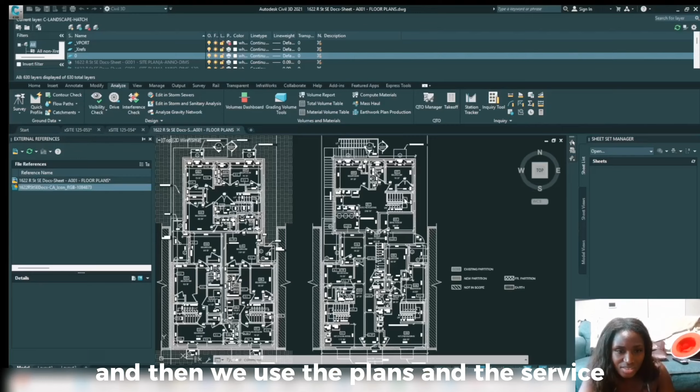After all the confusion of the design, we went ahead to call the client, which should have cleared things up, but led to more confusion. And then we used the plans and the survey's historical information of the site and information from the street view, and we got more confused. But enough of me talking.

Let's engineer something. So we're working on 1622 R Street, and it's a bit confusing. Are you guys removing the back of the lot and replacing it? Are we removing the back? Yeah, because the back of the building is more narrow than the survey. There shouldn't be areas on both sides to walk in. But there is on the survey, the plans that you guys shared.

Maybe because the plot I have, the survey that I have, has the complete overhang. Okay, can you please send an email so I can ask what's his name about?

Yeah, I'll ask. I sent an email earlier, about 2 hours ago. Because I'll follow up on it.

We're not. We were trying to do a lunch and learn, like a learning session with this project, and it keeps stopping for these small questions. Because I was doing the grading of the back of the lot, and also because we are removing the back of the lot.

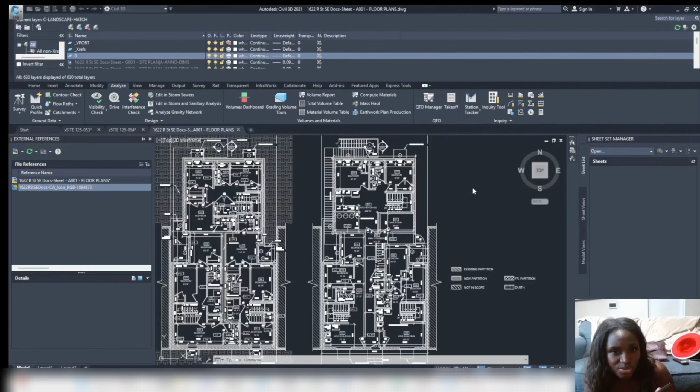So GAR will only be required if you exceed 100% of the tax assessed value. You're not exceeding 1.3 million, are you? Okay, so I thought so - GAR is not going to be required for this project.

Because I was thinking, if you are removing the back of the back of it, I feel like that's going to make this project a little more costly. No, we're not doing that.

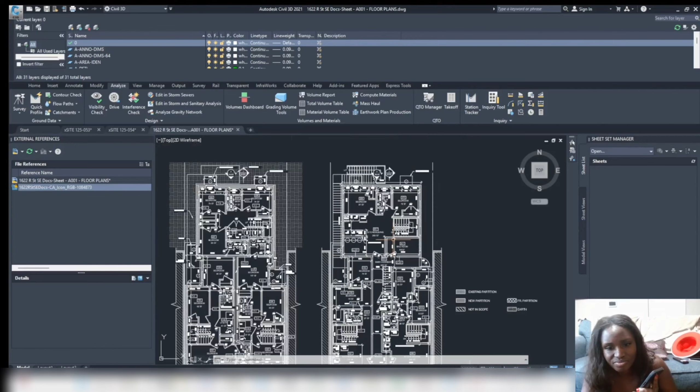Okay, I will send the survey again as well, just so they know. They're even showing the back of the lot as the building as new, and then the front is existing. So on the 4th floor, we're adding onto it because it's not extended all the way on the 4th floor, so maybe that's what they're showing as new.

I'm only looking at the cellar plan, and I'm looking at the cellar plan and the first floor. Okay, yeah, that's a good catch. I'll follow up with them as soon as I can.

You sent the email already? Yeah, I sent the email, but I'm gonna follow up and send more clarification to figure out what's happening. Because that was 2 hours ago, but now that we're getting deeper into the project, I'm seeing a few more things. So I'm just gonna send an overall email of all the issues. Okay, thank you, perfect, bye.

But I'll give us another 30 minutes. We're going to stop doing the site design and go into the utility sizing, and then I'll let you know. Okay, all right, thanks, bye.

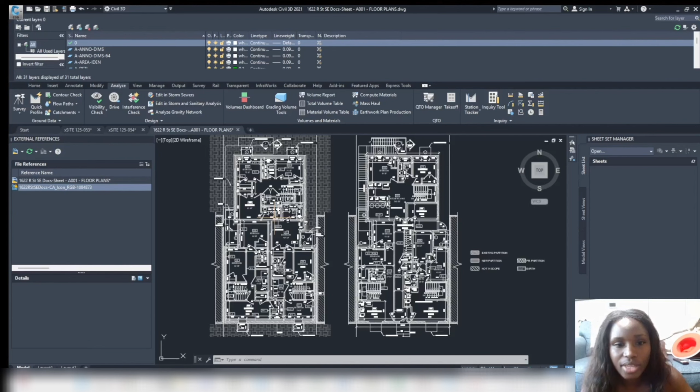That will just be summarized in the email. So for now, we're going to stop on the site design because that's a bit confusing, but we're going to keep that back parking area - that shouldn't be changing.

It's a different platform, yeah. So can you zoom out a little bit? I just have a question. Oh, I already closed out the other plan. The expect - oh, this one. Okay, good, yeah.

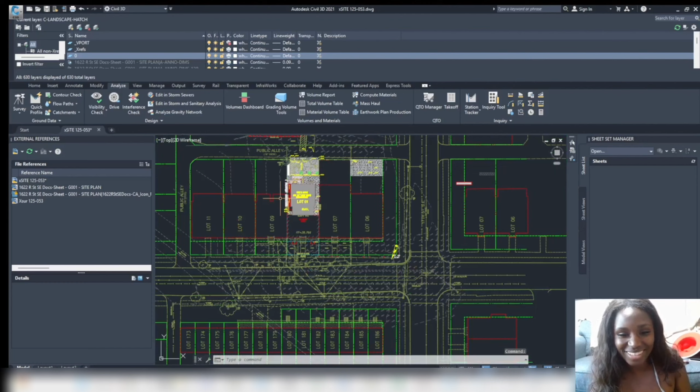So at the end of the parking lot, you see the elevation there. Can you zoom in? Yeah, it's like around 35.82. I think we need to remove one of these - this one? 2 stairs. No, if you go down. Oh, A2, yeah, for sure.

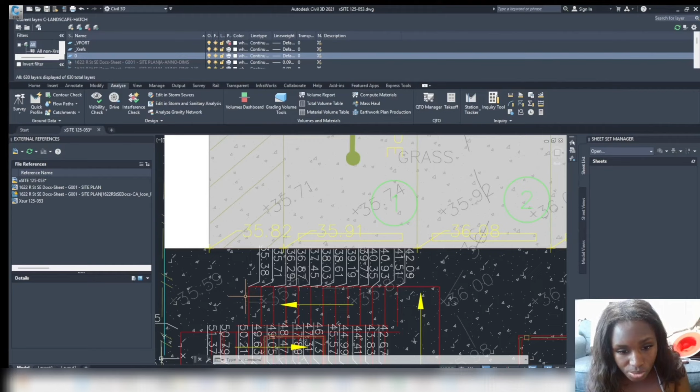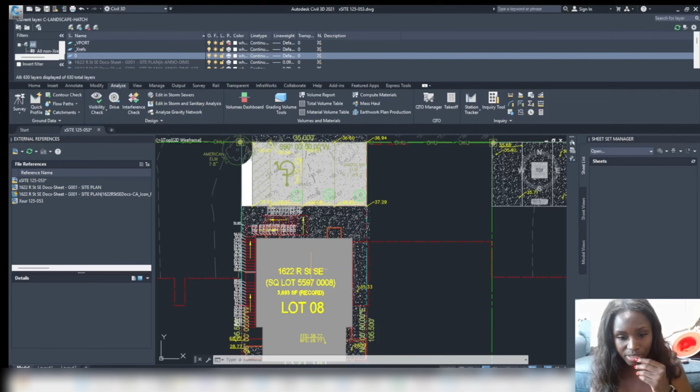We're gonna have to remove at least this stair and this stair, and this one we can just adjust it and make it a little bit more shallow. Okay, yeah. But we're gonna have to, or also we still have to go up another 2% or so to meet this elevation. But he said we're not narrowing it, so we're gonna leave it.

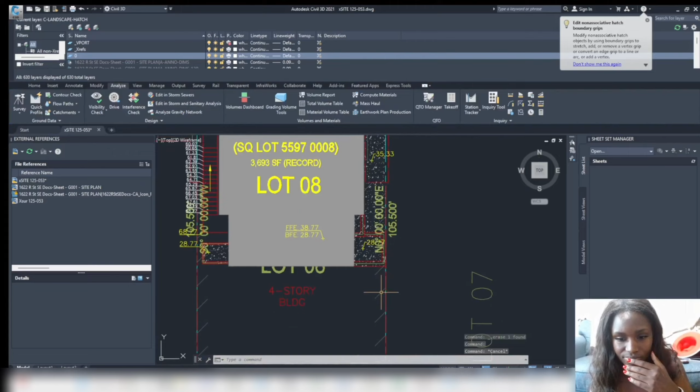And also this is building, and this is building. Let me see if Victor has pictures. This is building. Yeah, this is building, I don't know - doesn't show it's a building. So this is the building. This area and this area is showing that they're cutting into both these sides right here.

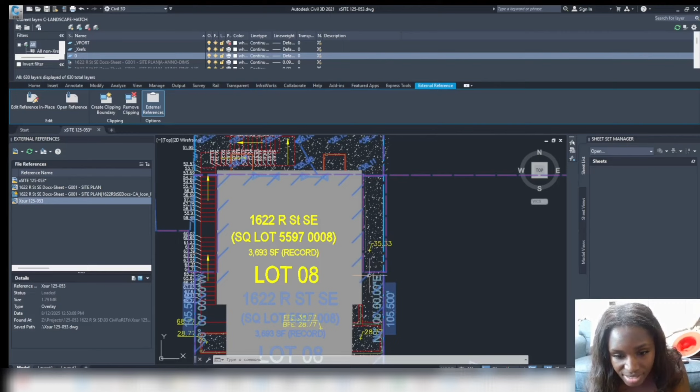So it's not like it's fine that it goes all the way here - it's probably like an overhang here, but it keeps going past this area. I honestly thought the second, third floor, the floors, are more extended than the first floor, so that's why this area is not part of the ground footprint, the building on the footprint. That's what I thought. Yeah, let me see, review.

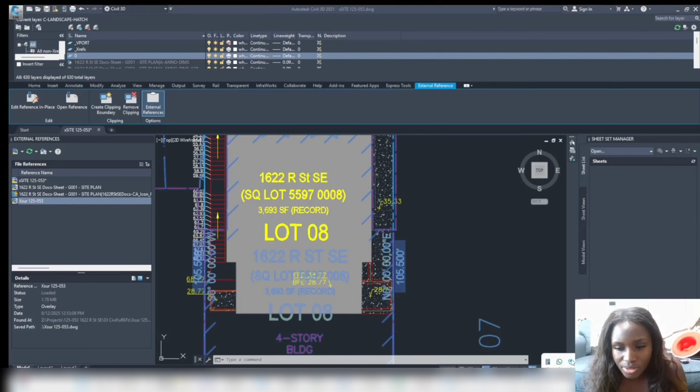I think the thing that's more so confusing is this wall report, showing that the wall goes - yeah, that there is a wall that goes to the ground. To the ground, yeah.

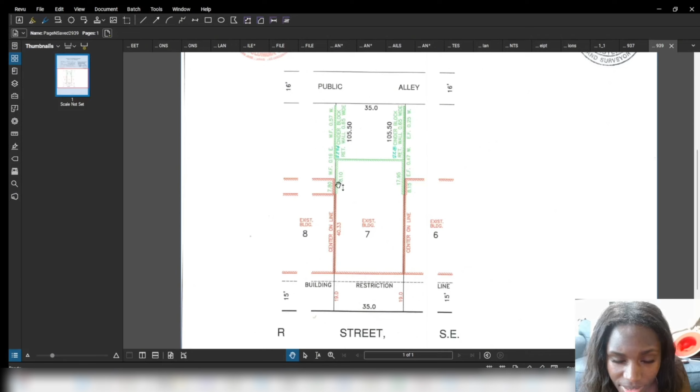Okay, so it's about - so this is 7.8. And that was only like 7 years ago, 2018, when this wall report was made. So it shouldn't be too much different. Let me look at the survey.

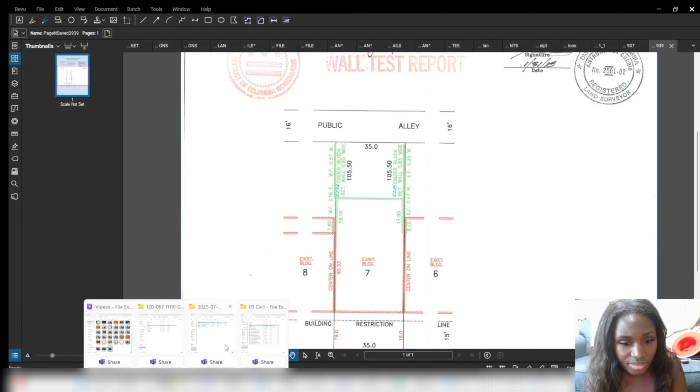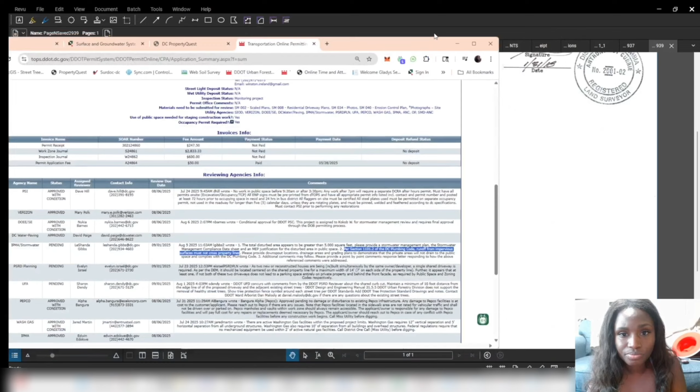Oh, we can actually do street view with Google Maps and see how the building looks like right now. Yeah, hopefully they have an image from the alley. Yeah, I'll check this now. Darn, whatever. Okay, layers, okay, just to get these inspected.

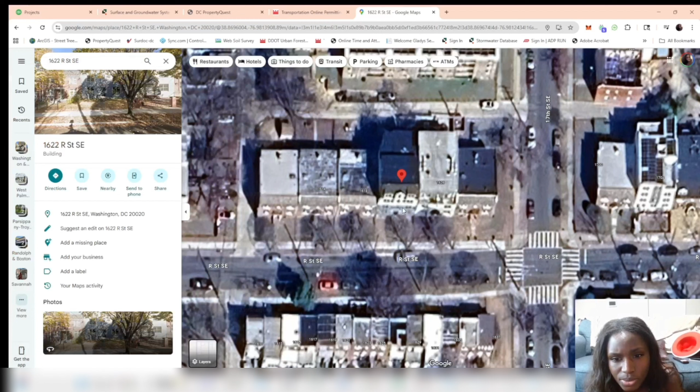Here's the start. If you click on the street in walking view, it will show you. We can't see it because this building's kind of blocking it. And you can walk to the right.

This is it, right? Maybe, actually no, this is it because that's the wall that we just saw. There's the wall, and yeah, that's a wall. So that's a wall, and that's a wooden fence. So this is it, so it does have windows on this side.

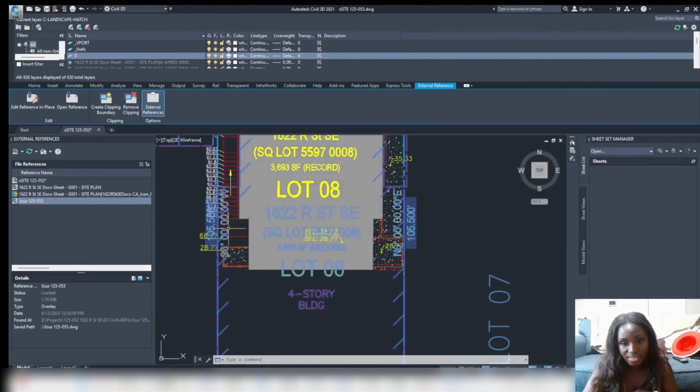And it has, so that's what Victor is showing, that it does have an egress here. It's just how far does that egress go? I think they have it going further in.

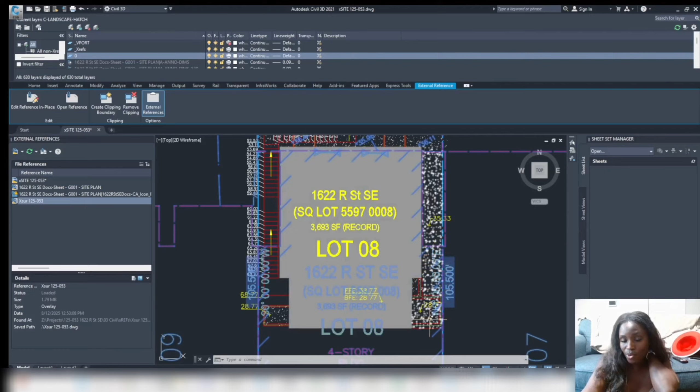So this goes, yeah, they have it going further in. Oh, and the stairs are inside? They're not external? I think they just either, I don't feel like we drew it wrong. But it seems as if the person that measured it probably over measured. Let me double check one more place before I send out a mass email.

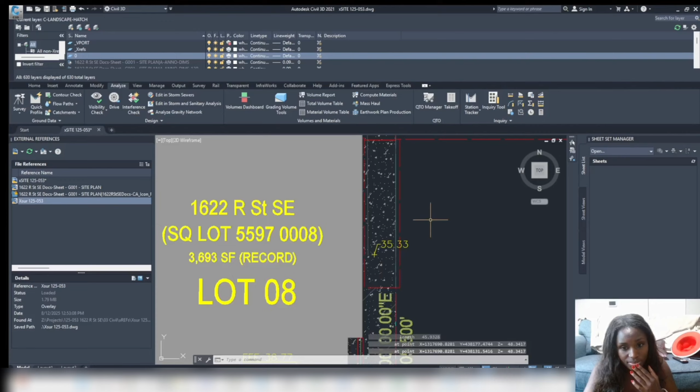'Cause we don't want to be too wrong, just yelling crazy stuff. 38, that's 35, 45. Okay, I'm not an expert about this. God, doesn't make sense. Who are you?

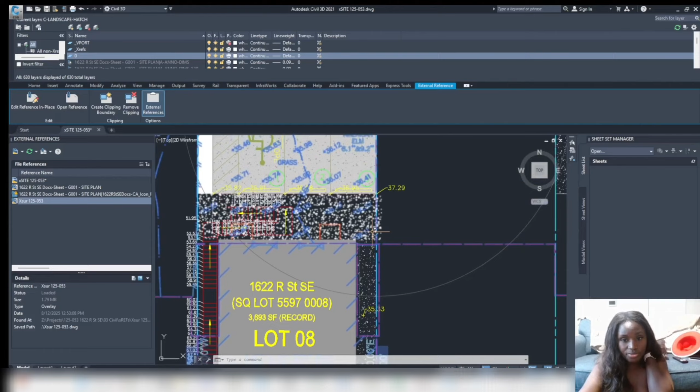Okay, so that aligns better. That's about 45. Okay, so 45 makes more sense. This is something else, 38. And 45 is up to the wall. Okay, so 45 up to the wall, that's what it is. Okay, so the 45 makes sense because it goes up to this wall and this wall.

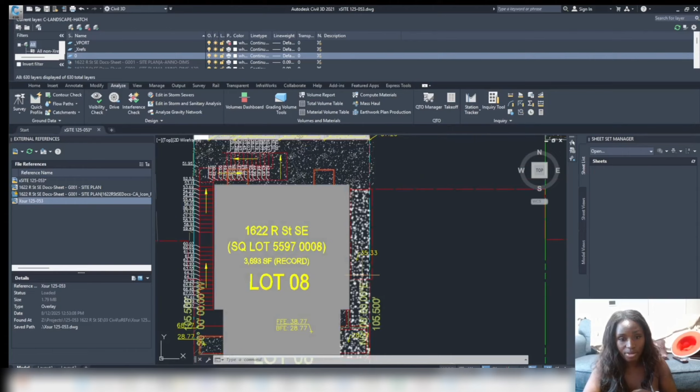But them going deeper, that means, yeah, I think they just under measured. I think they made a mistake and under measured. So it should be, the wall should actually stop here, really, on both sides. So we'll let the architect know that.

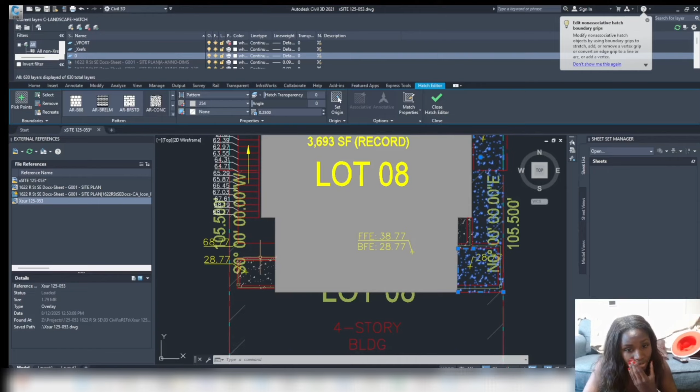So let's go ahead and just, we know where we stop. We're stopping, just doing the grading here. Let's just go ahead and grade up to this wall. So we're gonna grade up to this wall, and it's grade up to here. And then we may have to later on revise this grading as well.

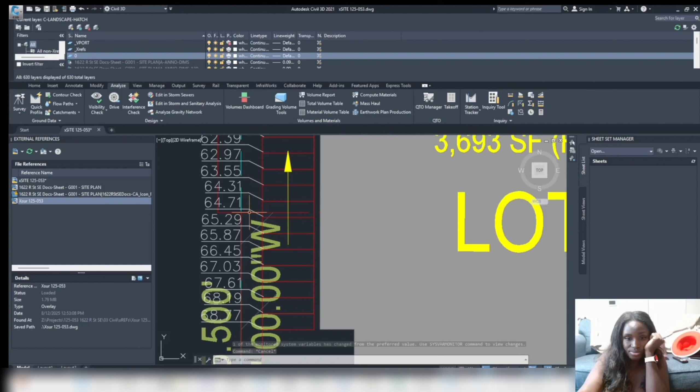And add more steps, really, so that we can, because we have to remove some of these steps here. Why are you removing some of the steps here? Because it only goes up to this wall. Oh, yeah. So if it only goes up to this wall, and I think they probably oversized it and it actually stops here, yeah, that means that's gonna have to be revised.

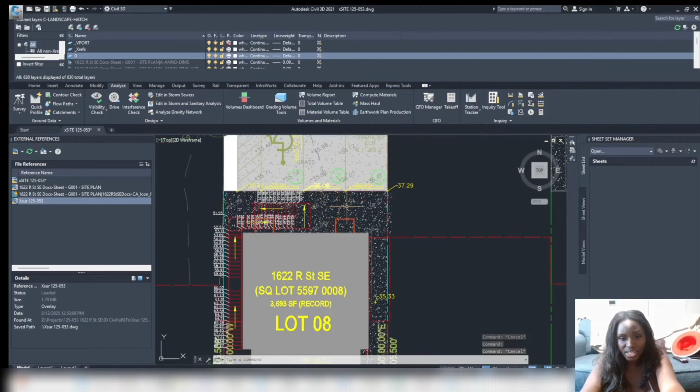Oh no, okay, so do we wait until they reply first? Yeah, we'll wait, so we'll stop. I was gonna just grade up to this wall, but yeah, we'll just stop the grading for now. Let's go ahead and quickly, it shouldn't take as much time because I'm just gonna do this really quickly. But we're not doing profiles today, I spent a lot of time with the grading. No, the grading session instead of profile.

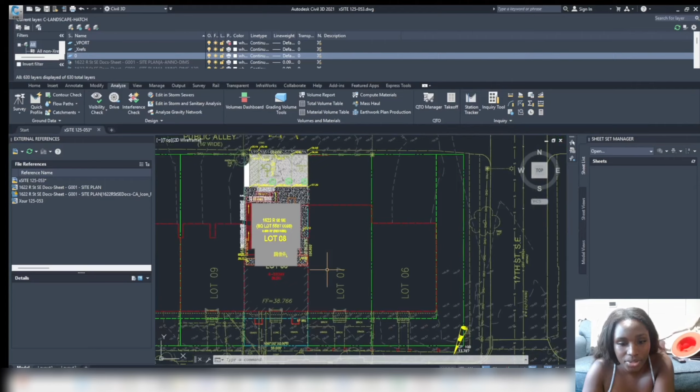Quickly, also, yeah. So there's water, sewer, gas here. You will have these from DC Water. I removed them in the demolition plan. I abandoned them. Okay, awesome.

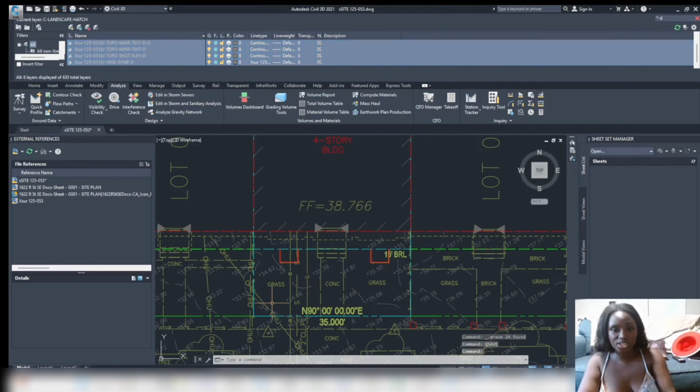Just so you know, there's per DC water. Okay, you didn't demo them. That's fine. Oh no, I didn't demo them here, I mean the plan. So these per DC water, when you draw these in, they should be about 3 feet apart from each other minimum.

And outside, so you will see the MEP plans. They'll show them close to each other leaving the building. But once it leaves the building and crosses the property line, DC Water wants them 3 feet apart from each other, 3.5 feet or 3 feet. Yeah, 3 feet apart minimum.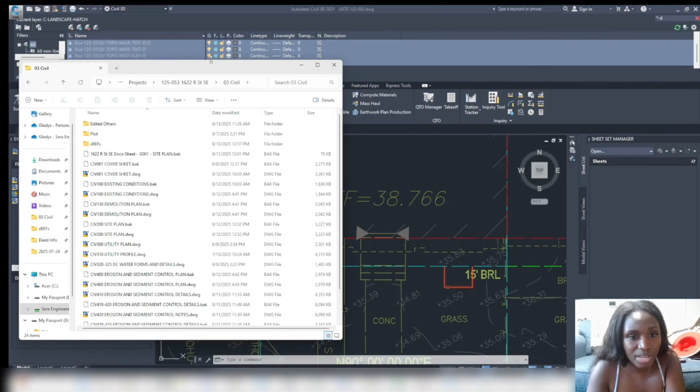So you don't have a design folder, so I think you didn't start tackling that yet with Patrick. Let's usually just copy the design folder, a lot of stuff. Most likely we'll just remove or delete.

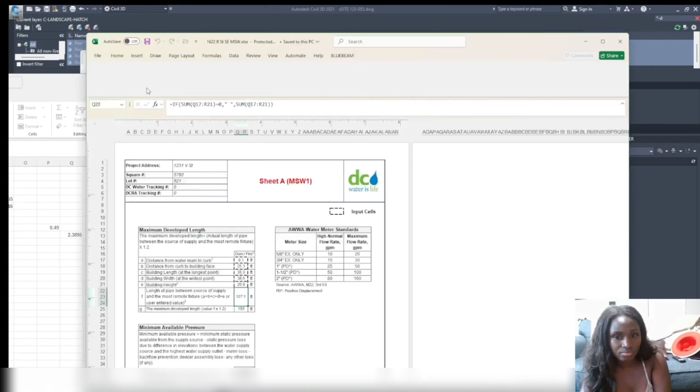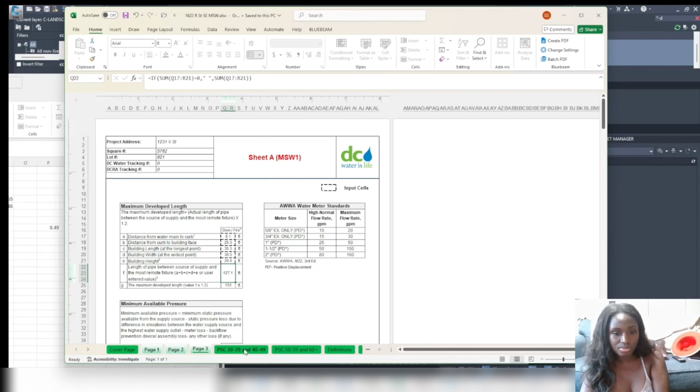Okay, so quickly, I'm just gonna teach you how to fill in this MSW. Only DC Water has this MSW. Other agencies, like Florida for example, they give you a calculation to figure it out. But DC has their specific standards that they want you to use, which is pretty good.

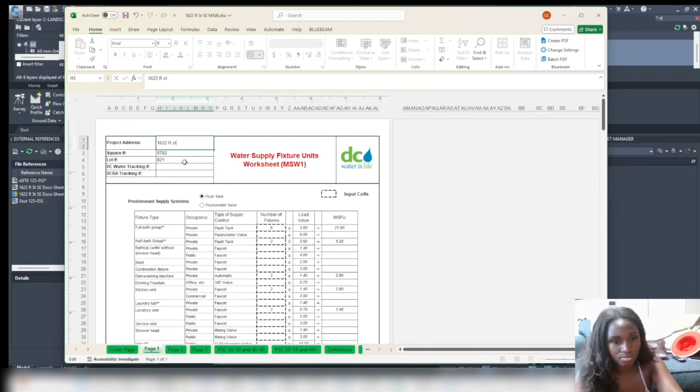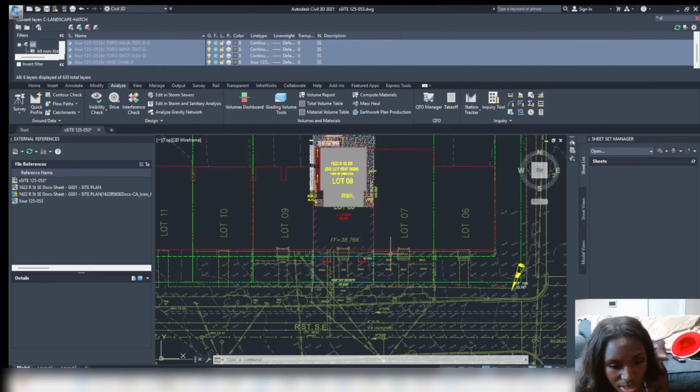So here we did get the plumbing progress that I sent to Patrick on the 25th. This was not saved, so we'll go ahead and save this now.